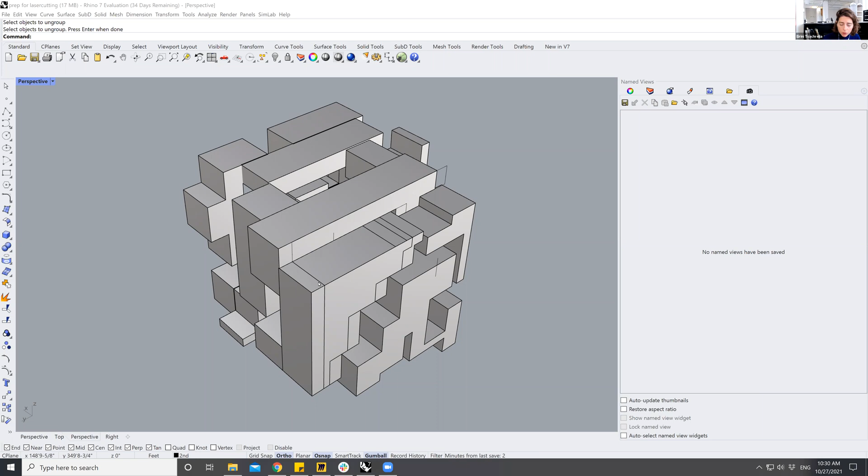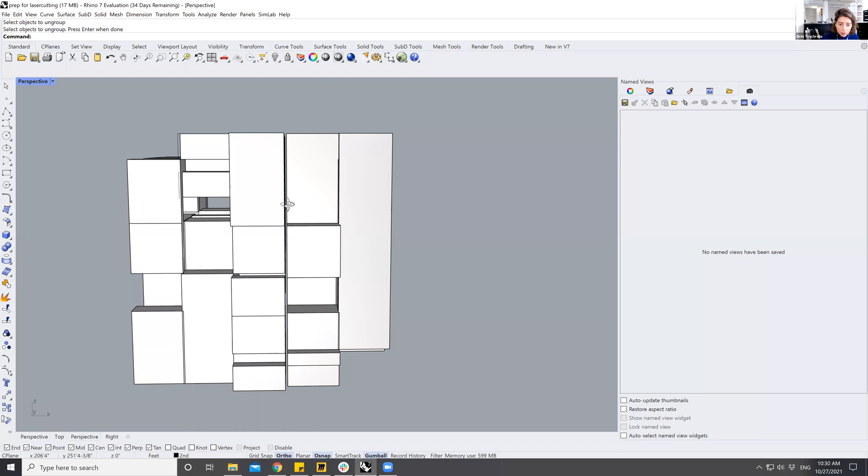All right, so I'm going to demonstrate how to prepare your file for laser cutting. You should have a cube which may have some imperfections that need to be cleared up to prepare for laser cutting. Any duplicate lines, duplicate surfaces, misalignments like these ones, or gaps in between layers are going to create a problem with laser cutting. So I will show you first how to clean it up a little bit.

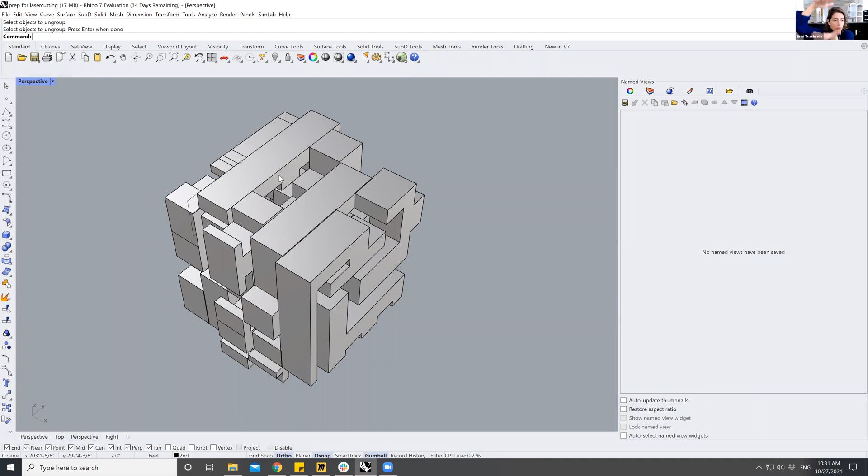Then how to use the contour command to create the layers that we need to stack. It's going to be kind of a laminating approach, layer over layer over layer over layer. The laser cutter will do that cutting for you, and all you have to do is glue those multiple layers together to produce your model.

So first things first, cleaning it up. I don't want to have any external curves in my file. I just want to have those surfaces or poly surfaces. So to clean it up quickly, if you have messy layers here...

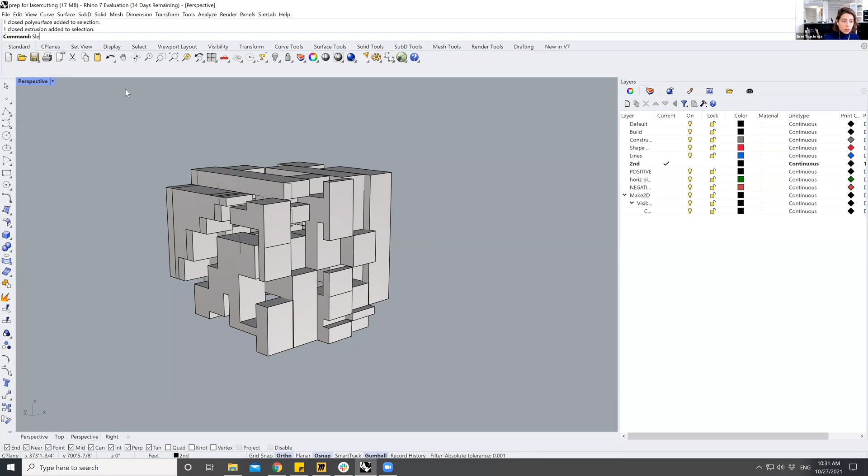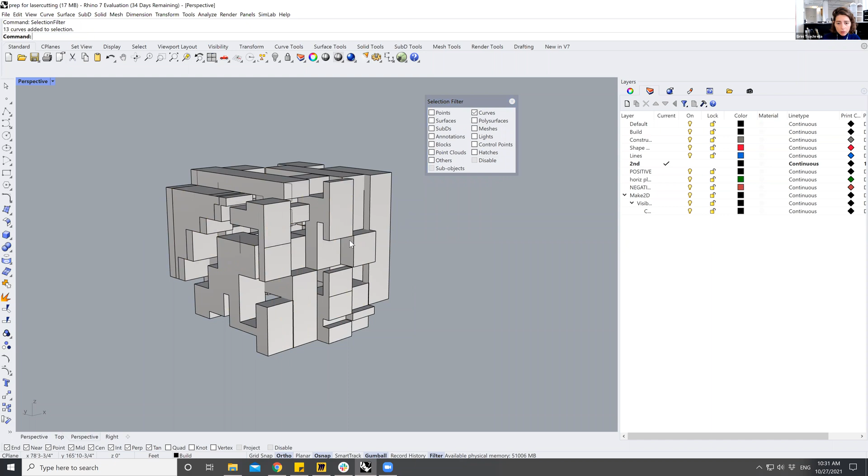You can use the selection filter command, selection filter, and I'm going to only use curves. So as I'm filtering the curves, when I make a selection now, I can only select curves. I've blocked everything else, all right? So this is a quick way to select the curves and technically delete them. I select and delete. This is the fastest way to clean your curves.

Now I want to make sure that I enable everything else again, otherwise I will not be able to select anything. All right, so this is the selection filter. I use this to clean up, get rid of any curves, so I only have surfaces in my file.

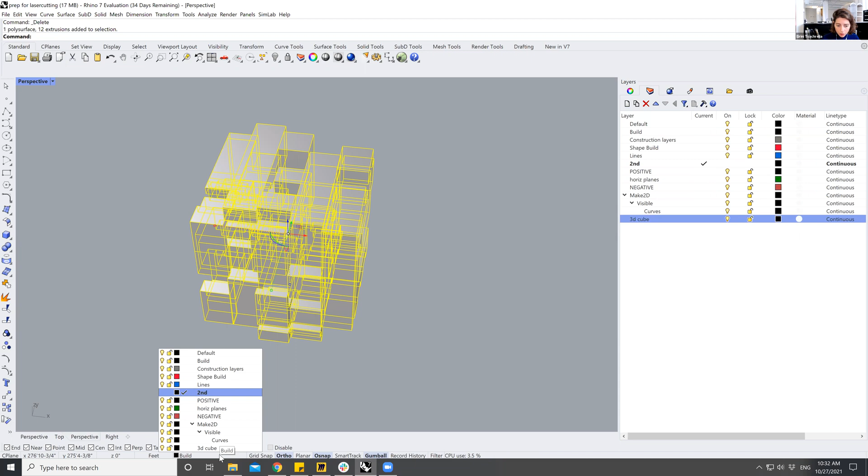I also want to clean up my layers. Okay, so I can create a new layer, call it 3D cube. Make sure that I place everything in that single layer. I can change the layer from here. Okay, so all my geometry is still here. I have other things in the file that I want to preserve, but in your case, you should delete everything else and just have one layer called 3D cube.

I have a question. So for the selection filter, if we only select curves to show the curves, will it not show when we're working on the stuff like the points and everything here? Will it not show while we're working on it?

It does not change the visibility. You should still be able to see everything, but you will not be able to select it. So if your filters, for example, deselect surfaces, you will still see them, but you will not be able to select them. Oh, okay, understood. All right, got it. Okay, good.

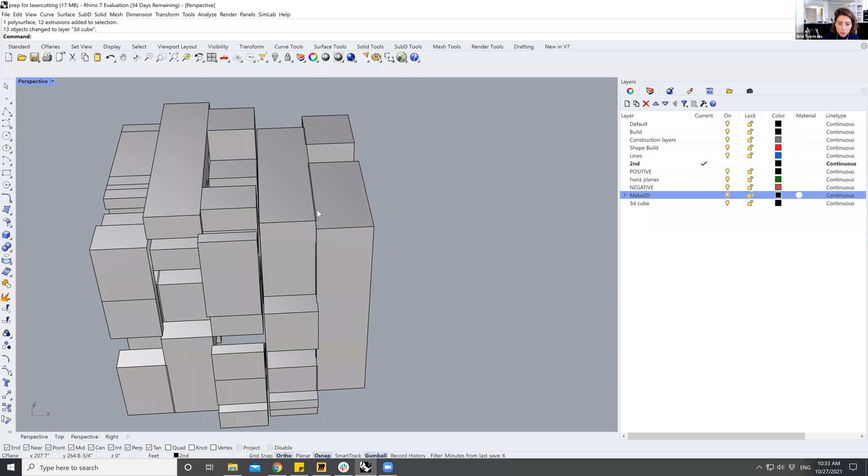So back to editing and refining your model. If there are still gaps here or duplicate surfaces, for example here, this surface appears twice, I want to make sure I delete what I don't need.

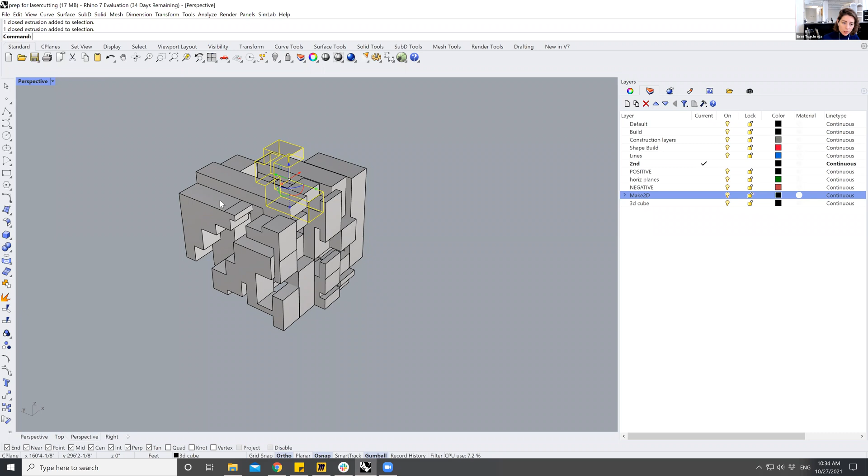If your model is grouped, and if it happens to be the case that your model is a single group, I want you to ungroup it, all right? So ungroup is the opposite of grouping, so you're able to select piece by piece. And ungroup, so I'm able to select little by little.

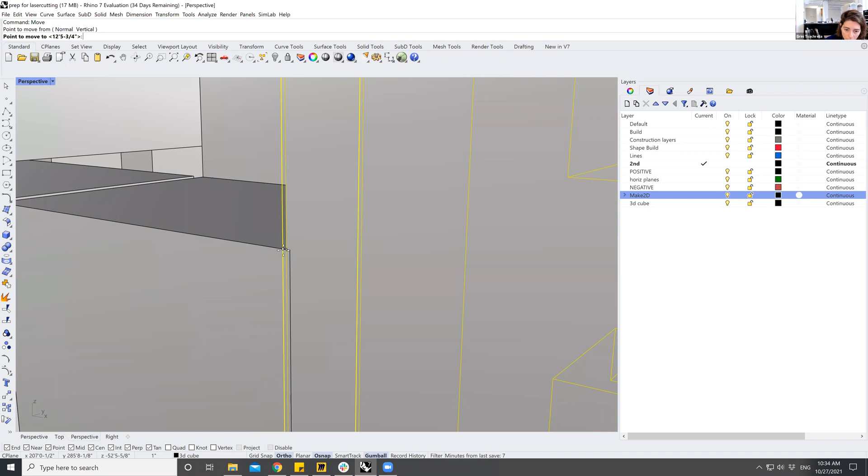And correct it. So in this case, I want to select these pieces here, use the move command, move it from here to there, micro adjustment, but very, very, very important, so I have a clean edge. Now I need to select both of these and move them again, move from here to here, so I have a clean edge. All right, so this is a very, very important step.

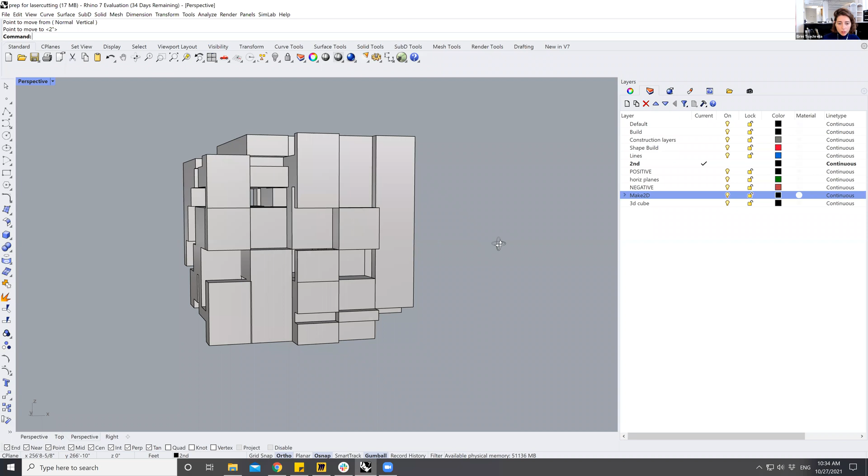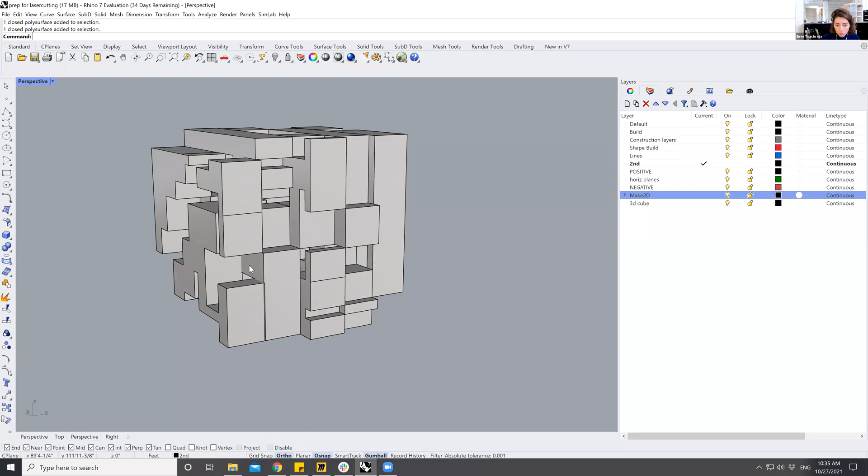These are joined, I think. I'm not able to ungroup them. So that may give me some trouble. If this is the case, you may have to redo that geometry, but it looks like it's touching each other. Okay, there may be a little bit of overlap. If this is the case, I have to either redo it or fix it after I create my contours.

So I'm done cleaning up, with some imperfection here which I will have to address, but everything else looks clean, aligned, no gaps, no superimposition, no duplicate geometry. So now I'm ready to contour.

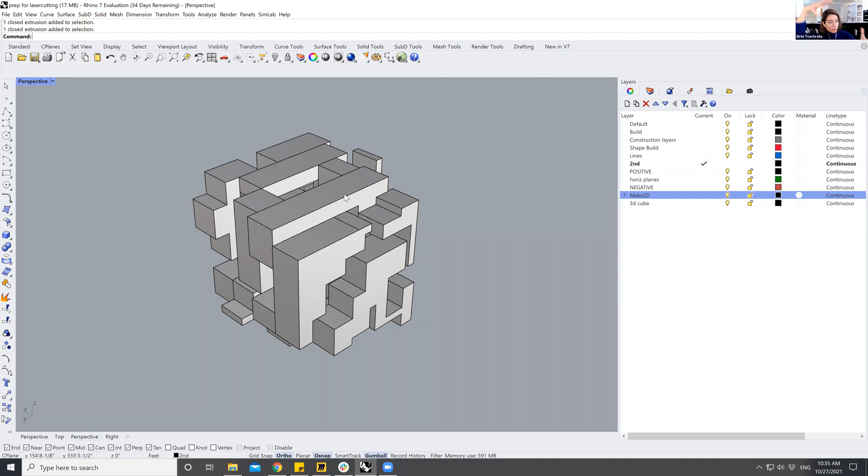So before I do that, I want to adjust the scale of the project, because remember, we scaled it up to be 48 feet, so it's real life dimensions. At 1/8 inch scale, it is really 6 inches. So I'm trying to make it back to 1/8 of an inch so we can produce a cube that is 6 by 6 by 6. It's like a scaled down version of your original. So I want to select from a point where I can scale properly, where I have a full length.

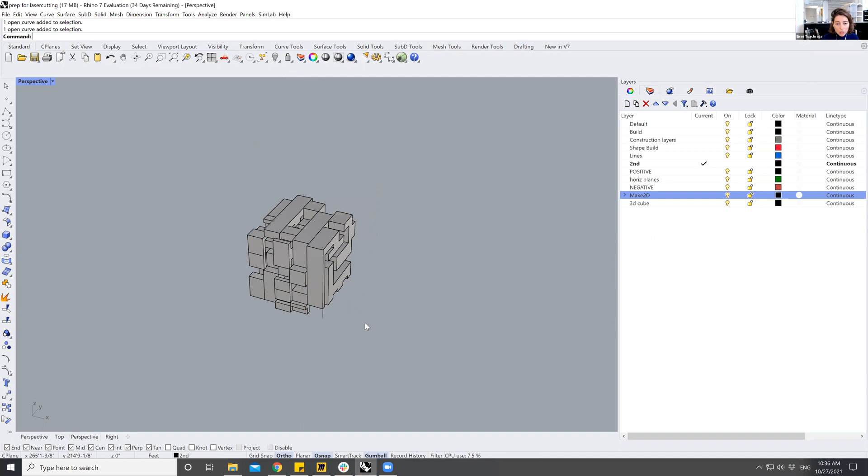If I don't see any clear line through, I can create one that is 48 feet, so I can just snap on something. I need to be able to grab the entire object and scale it down. So I'm creating an axis line only as a reference, just to be able to snap on it and reduce the scale. Now I have this reference line, I know this is 48 feet, and now I have to select everything and scale it down.

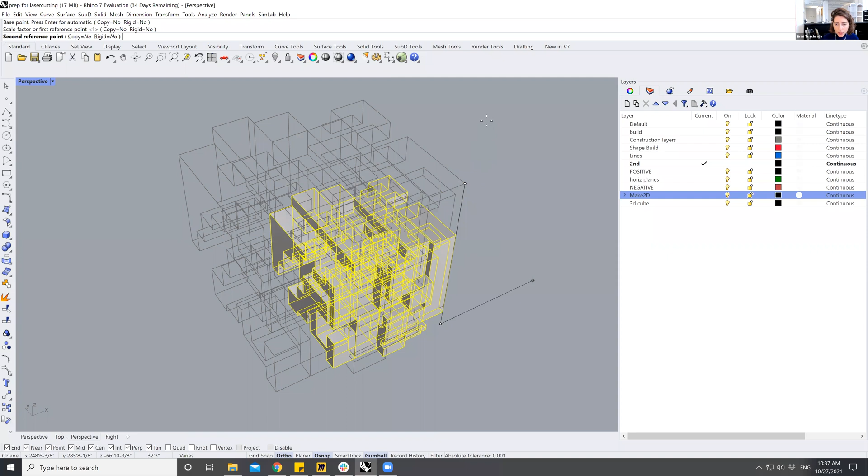To be only 6 inches for our physical model, it's 1/8 inch scale, so just 6 inches. I select the entire 48 feet and scale it down to be just 6 inches, tiny. To confirm, I take the distance, measure from here to here.

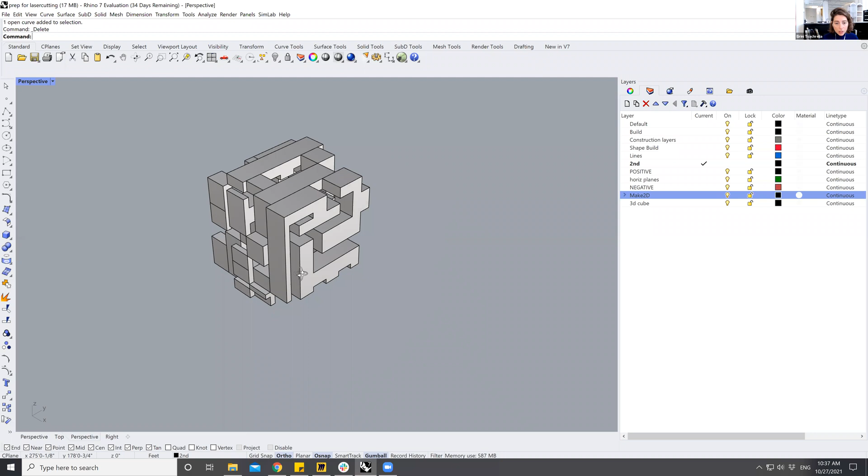It is 6 inches, so that is the dimension that you need for your laser cutting. Remember, the cork that you bought is a 6 by 6 inch square. If you have bought the corrugated cardboard, you bought a big sheet of 30 by 40, which will have to be cut down into small 6 by 6, 6 by 6 pieces. So now I'm ready to contour.

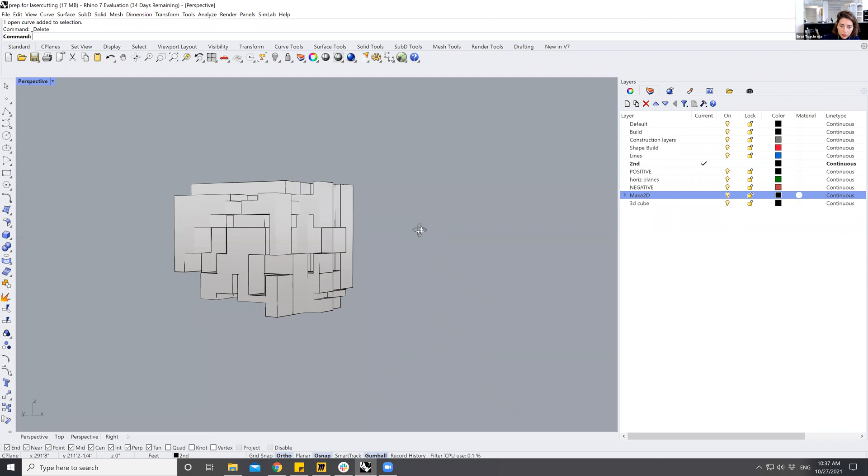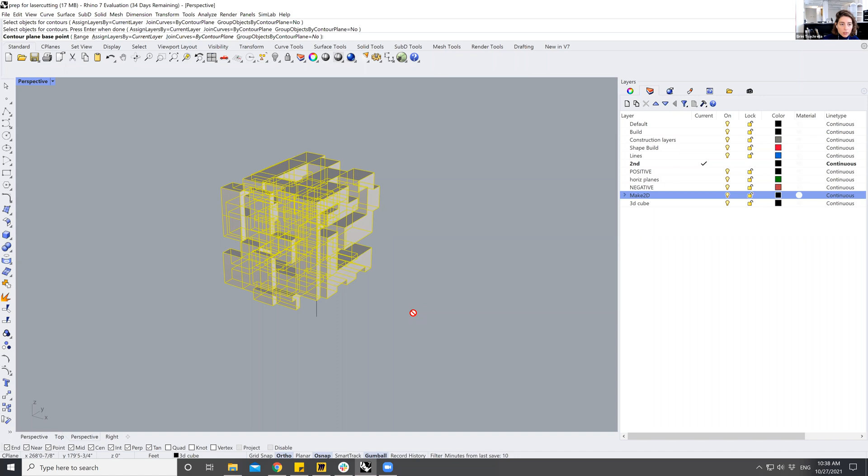I will still keep this vertical line as a reference line. I do the contour command. It asks what objects do you want to contour? I want to contour my entire cube. Hit enter when done. Where is the base point, the base of your plane? This is at the very, very bottom of your project.

That's why I'm using this reference line. I know this is the bottom, the very, very bottom. What direction? Here you can choose, you can run it either up or horizontal, either horizontal or vertical. Either way, it's your choice.

If I run it horizontal, it's going to cut vertical planes, which means that you will have to laminate them, glue them together, those vertical planes like that. If you cut it horizontal, you have to glue them horizontally. So for now, I'm going to run it this direction.

The distance between the contours is the thickness of your material, which is 1/4 inch. If you buy corrugated cardboard, it comes at a 3/16 thickness, which is a little less than 1/4, but we will assume that it is 1/4 for now. It's because with the glue and everything, it will come to 1/4. So please use 1/4 spacing between contours.

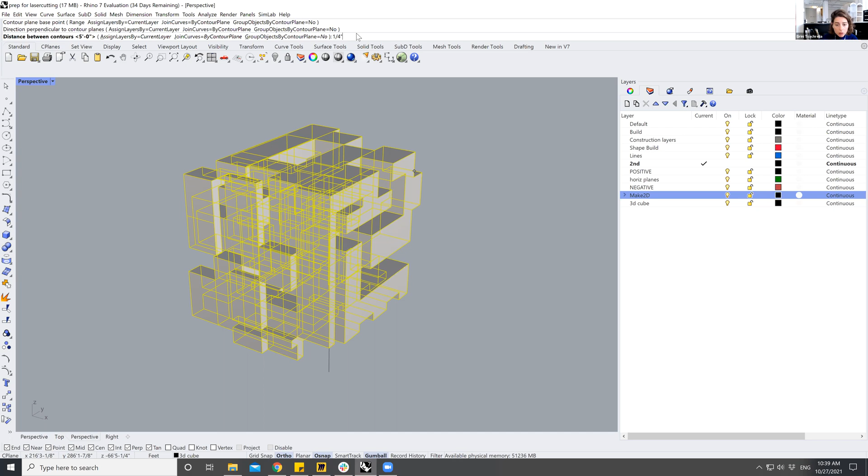And this is what it comes out to. I can move this over, and these are my 1/4 inch contours. So now I have to select one by one and place it flat in preparation for laser cutting. I will do one more thing, I will do it one more time.

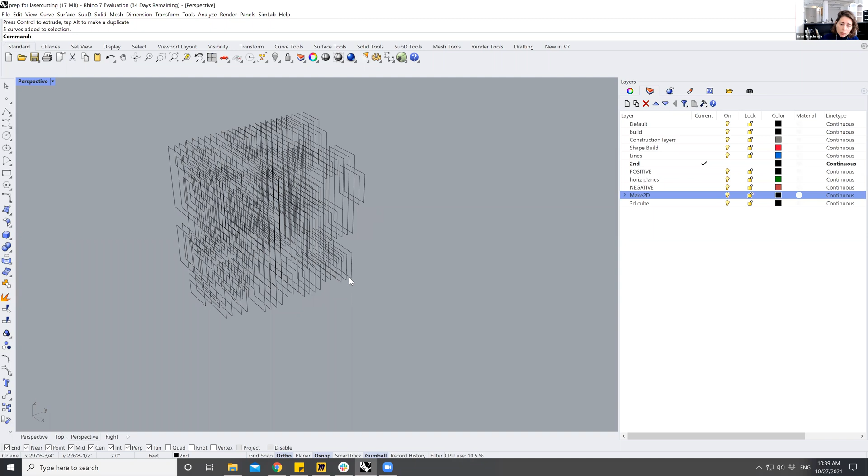This time I will also use the cube, so I have a reference. Otherwise, we may completely lose our outline, and we need that for laser cutting. So I'll step back, I'll do it one more time, but this time I'll use the cube from here, the corner here, and I make it 6 by 6 by 6.

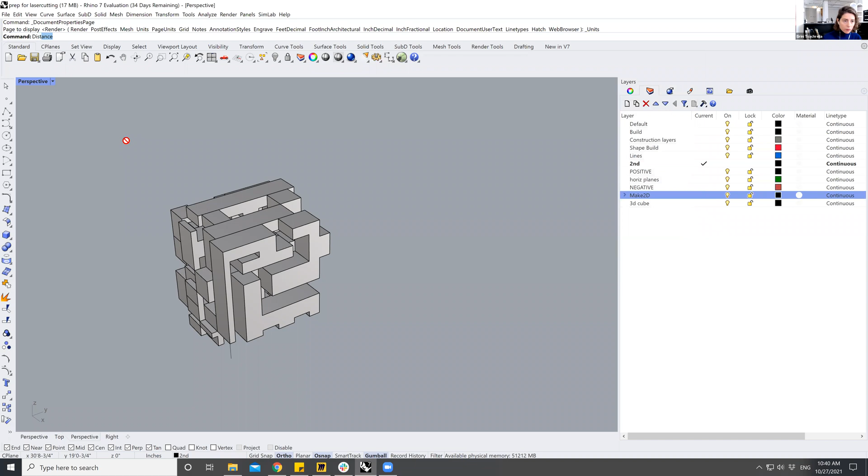This is feet, sorry. I can change my units. Keep it in inches, I don't want to scale anything. I'm going to confirm the dimension one more time. So it messed it up, I'll have to scale up again. Scale from here to here, it should be 6 inches.

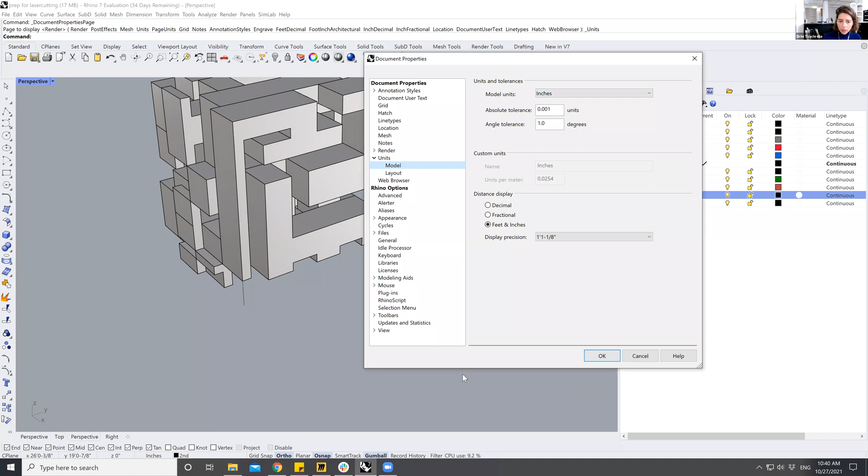So my units are in inches, say OK. The distance is 6 inches, I'm OK. Now I can create a cube, do 6 by 6 by 6. I'm going to move it to be in it.

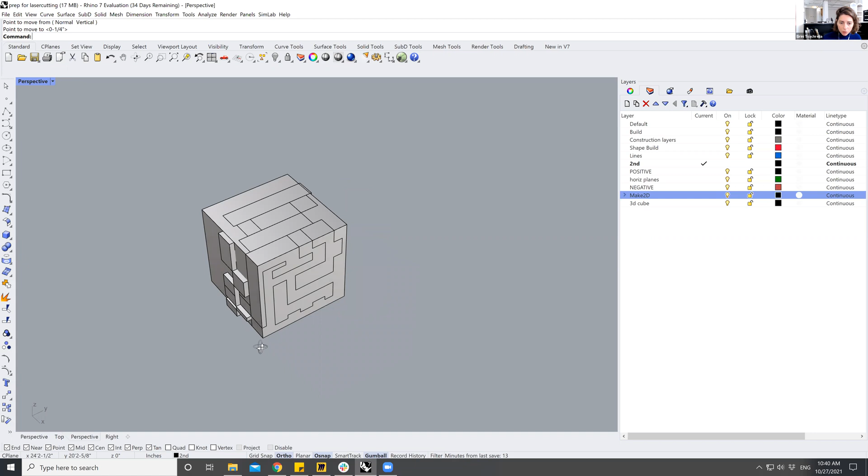So this is curious because there are certain objects that are exceeding beyond the 6 by 6 cube. That should not be the case. So the file that I'm using has a lot of inconsistencies. It is best if you fix this before you contour anything.

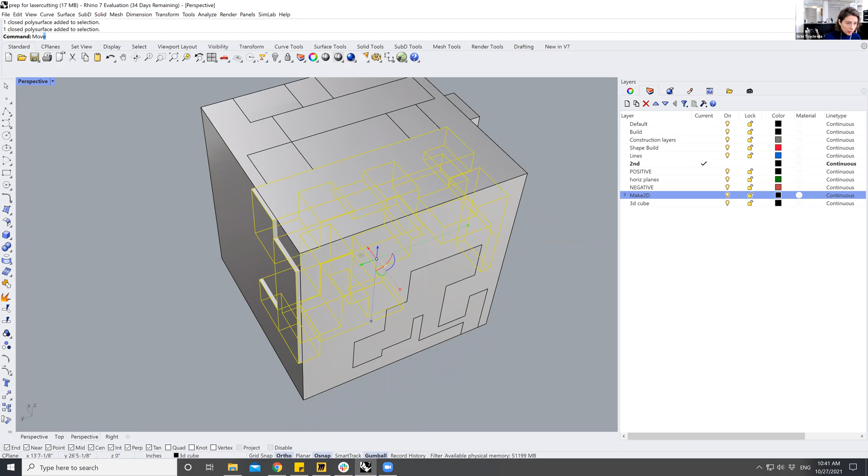So in this case, I'm going to move these pieces in perpendicular, and also move the pieces that exceed, move them in. It's a good check, actually, nothing should exceed beyond the cube. If accidentally it's happening, make sure to check all six faces. Nothing should exceed the cube.

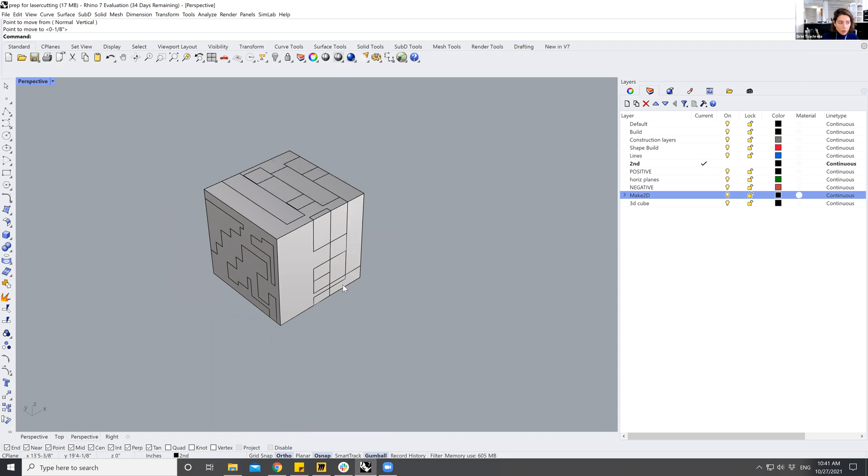All right, so now I have my original geometry within the cube, and I'm going to apply the contour command. The base is at the very, very bottom.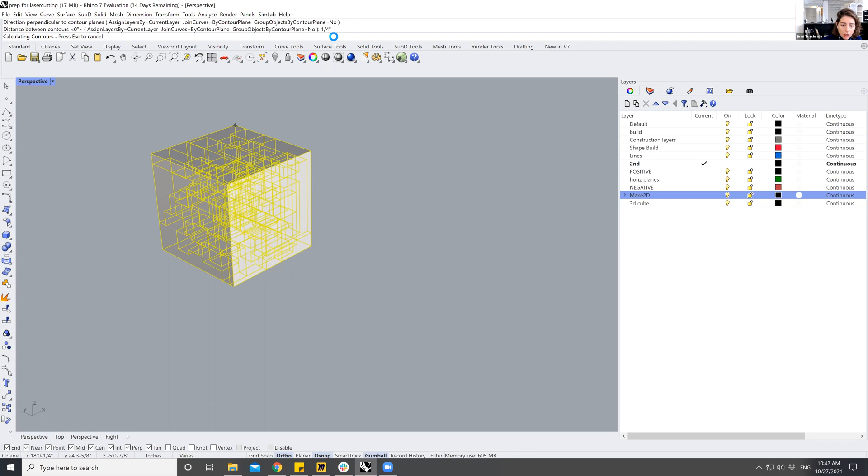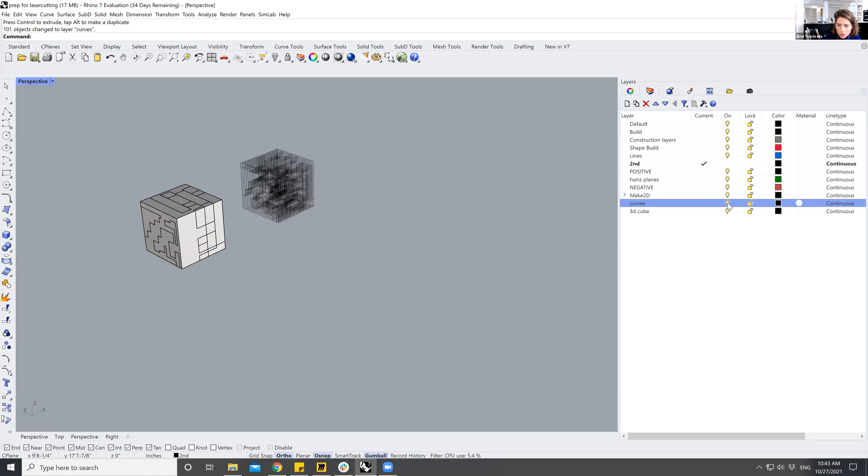I move this over. I can also put them in a different layer called curves, just to make sure they don't get mixed up. So now, in your file, you should have one layer called curves and one layer called cube. This also should be part of it.

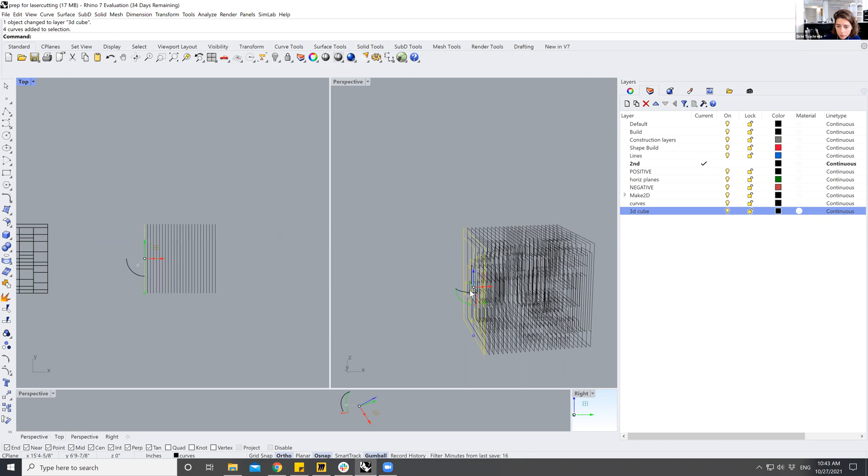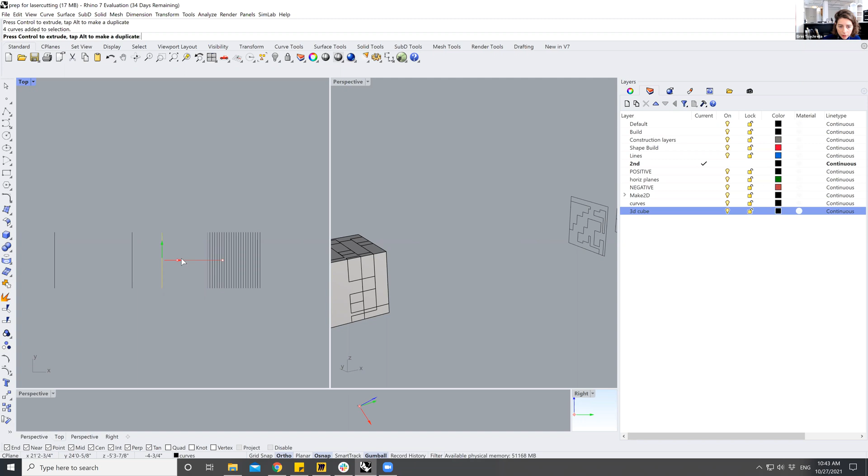Now you probably want to work from top view to be able to pull these contours apart. So I'm taking this pattern apart. I can move this over a little bit, and I have to lay it flat, each one of them, lay flat on the ground as I prepare for laser cutting. So I'm separating these out and preparing the file.

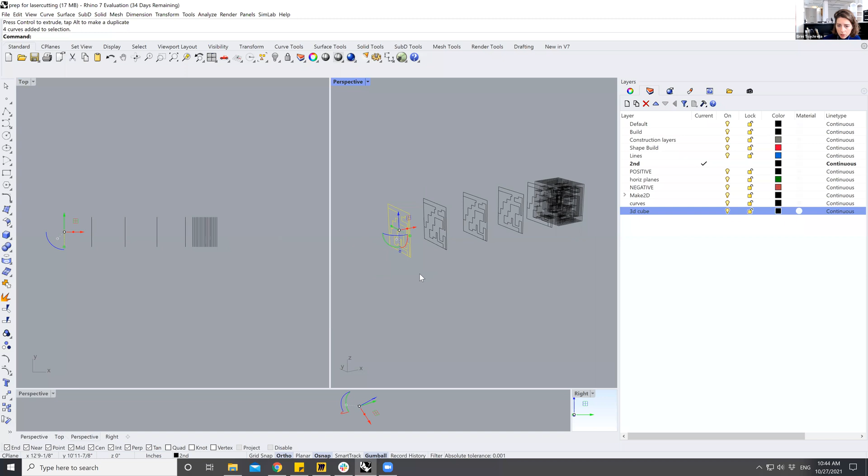There should be about 24 of them. I don't have to do all of them, but you will get the idea. So now I flip them down. Make sure that you do them in the right direction, same direction for all of them. These are the planes here.

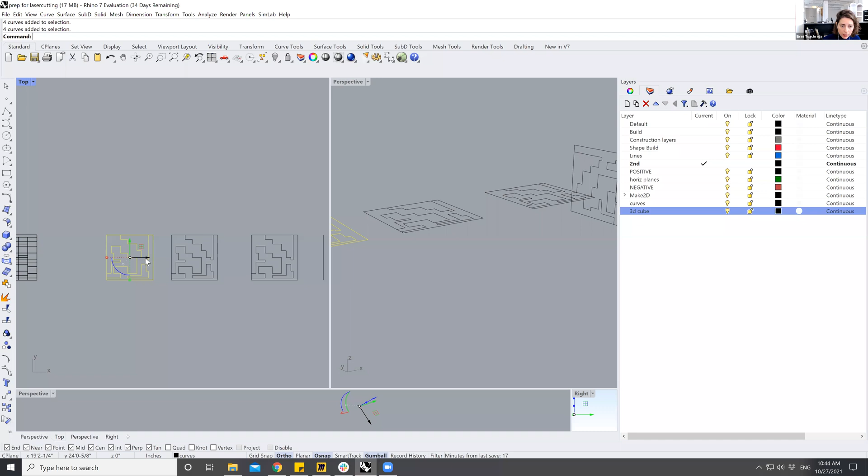Okay, I just hit here and I turn them flat down. So basically for the laser cutter, you're going to have a series of planes like that, which is your templates for laser cutting. They're side by side. All I'm doing is I select, rotate to lay it flat on the ground, and I place them side by side.

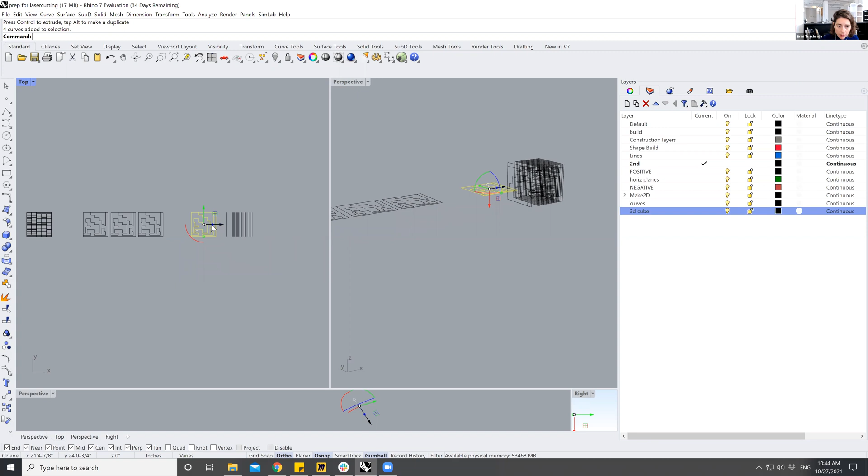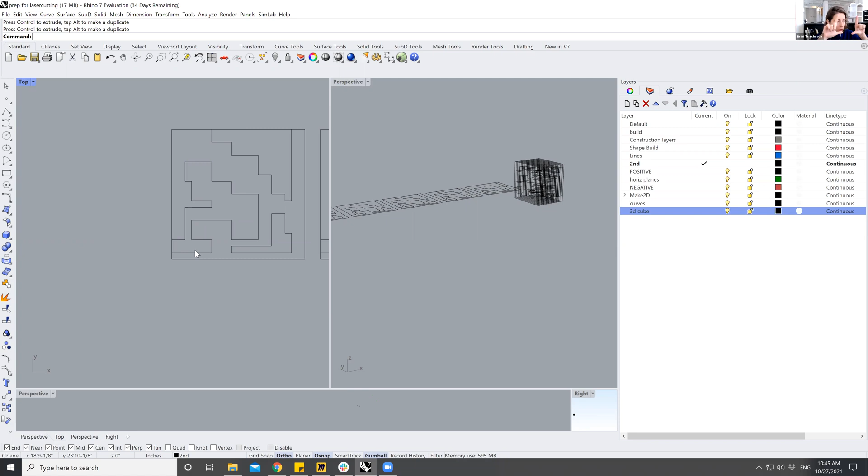For those of you who get the corrugated cardboard, you're going to buy a 30 by 40 corrugated sheet, a big sheet. Those of you who got the cork, you're going to get those 6 by 6 squares. So the laser cutter will cut exactly that on your cork, right? The cork is just 6 by 6. For those of you who have the 30 by 40, you have to create a rectangle here that is 40 by 30 inches, so I'm going to confirm that for you here. 3'4" is 40 by 30. This is how big your corrugated cardboard piece is going to be.

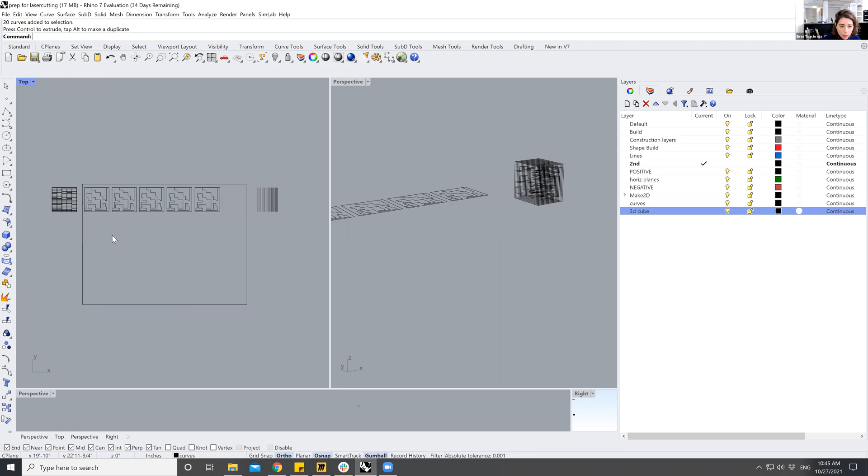So I'm going to have to fit all these pieces in my corrugated cardboard, and they fit. You can fit 6 at a time, have 4 rows of 6 pieces at a time. So here I'm going to make the 6th one flat on the ground and fit it in the 30 by 40. So I will keep going and have eventually 24 6 by 6 pieces.

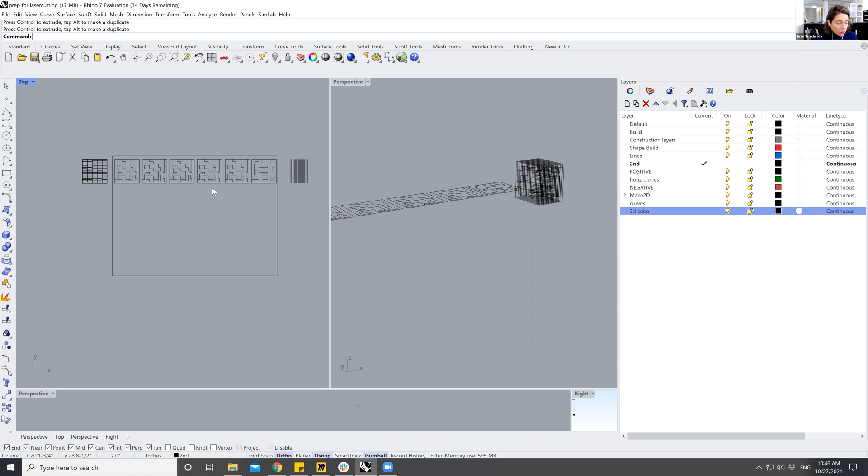Okay, so the layers are here. I separate them and I work between perspective and top view to be able to see what I'm doing. I move this over a little bit, and I separate out those planes.

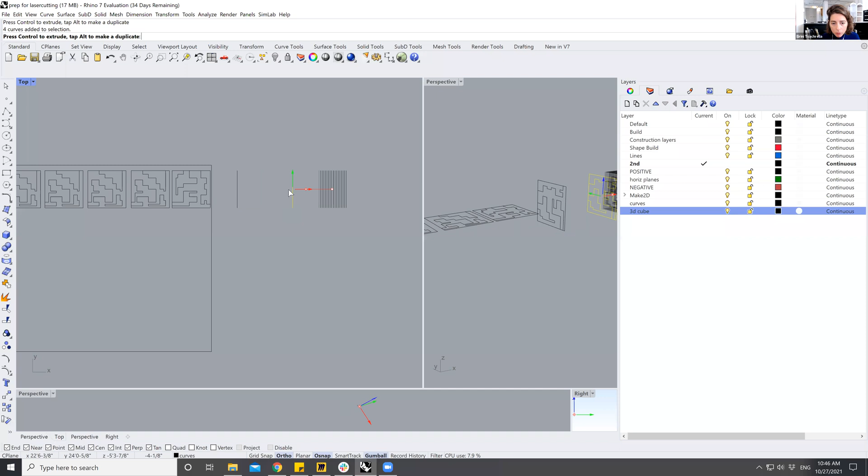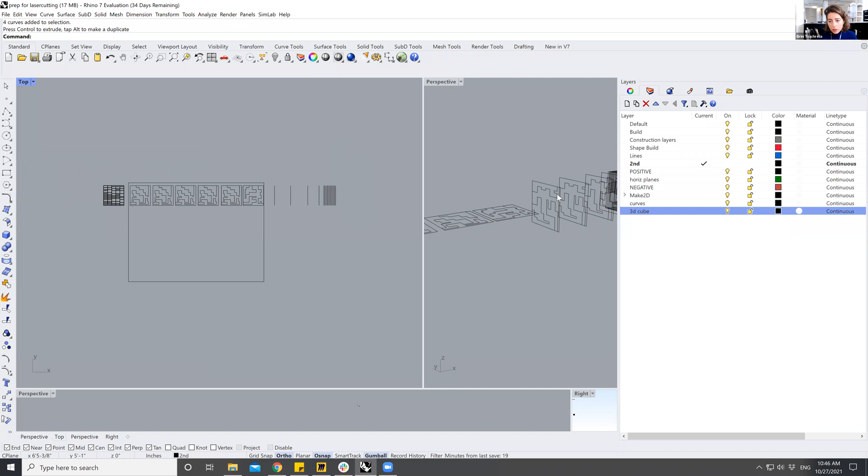Now, for those of you who work with cork, you bought 2 6-packs, so you only have 12 layers. You don't have 24, you have 12 to cut, so keep that in mind. You can select the first 12 this way or that way, whichever you like. So basically you're producing half the model if you bought cork. Any questions so far?

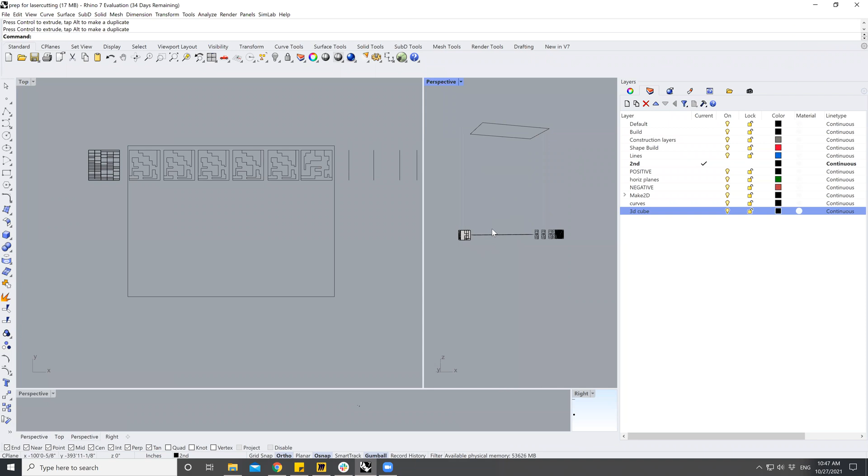Okay, I will keep going.

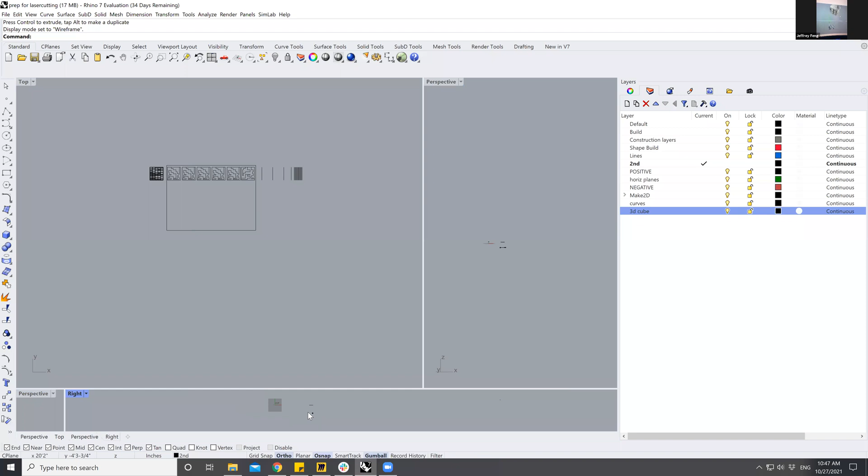Actually, I'm a bit confused on how I would make this, because with the other contour command, I don't remember the whole block being filled out as we separated the pieces. So that step kind of got me confused.

What do you mean the block be filled out? So we were running the contours horizontally and we were getting these outlines, correct? Jeff, can you say that one more time, please? So after you do the contour command, I saw how the block kind of filled in these spaces that we created. Is that just when we're using the contour command? No, when you use the contour command, it does not fill in the blank spaces. It just cuts a series of layers for you, depending on the direction that you choose. It doesn't fill in the voids.

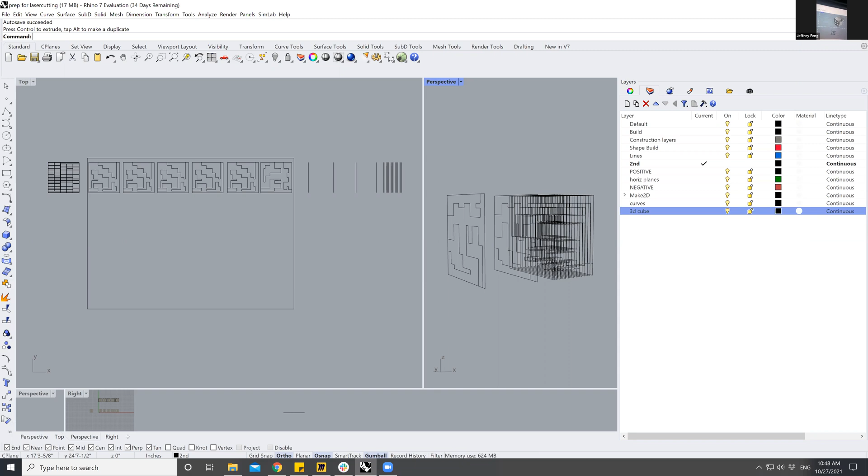Oh, okay, alright. So do you think you could just help me run over the command really quick? Because I don't know if I might... Sure, let me pause the...